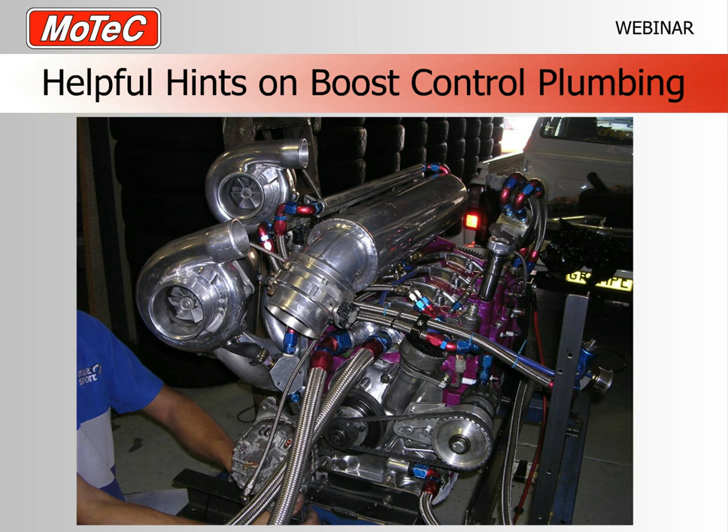This webinar is going to be about getting the boost control system to work correctly via the plumbing of the turbocharger system itself. Boost control, or closed loop boost control in an ECU, is dramatically affected by how the control system is set up. The plumbing of the hoses for the control valve, the turbocharger itself, everything affects how the ECU responds, or how the system will respond to inputs from the ECU.

So today we're going to talk about a few different boost control types: restrictors, some of the control valve differences, some precautions when we're getting this thing set up, some ECU precautions that we're going to go through, things to check inside the ECU, and perhaps a way of testing maximum boost pressure.

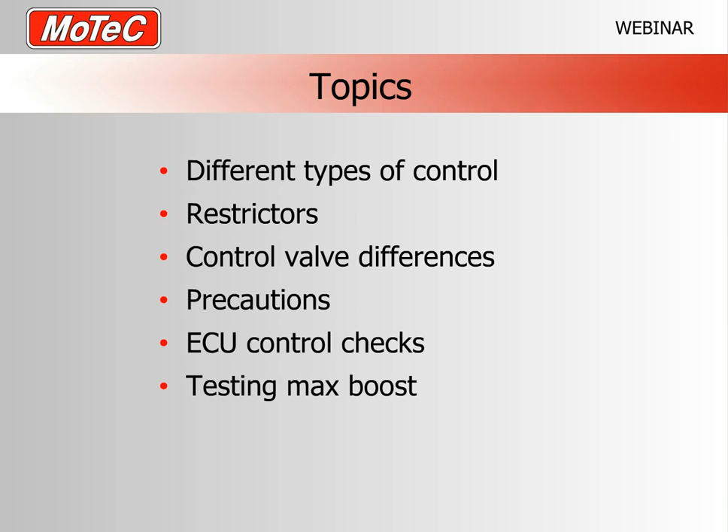So we can have a no control system whereby the turbo, in fact you can have a dead no control system with no wastegate at all, and some diesels have that. But most systems today have some sort of wastegate that gets rid of exhaust pressure to slow down the turbocharger wheel.

Now a very simple system, which was out about 20 years ago perhaps, where you have an integral wastegate, and a simple spring operates against the poppet valve. Once the pressure from the turbocharger exceeds the spring pressure, the gate opens and the exhaust pressure is relieved, and the boost is limited to basically that spring pressure. So there's no control of that other than the manufacturer setting the tension of the spring.

From that system we went on to a manual bleed system, which you'll see shortly, whereby we waste air away from the pressure on the wastegate diaphragm and therefore not let it achieve the boost required to lift the diaphragm against the spring. That way the turbo can make, say, 10 pound of pressure before enough of that pressure gets to lift a 7 pound spring. So the more you bleed away from the system, the higher the boost.

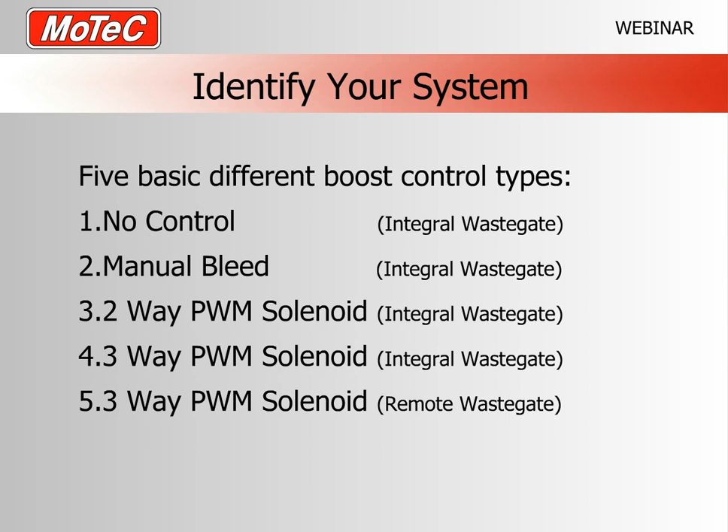Then we went to solenoids, where instead of a manual tap, a solenoid bled air away. Then a 3-way solenoid did it a little bit smarter, and then we went to a remote wastegate on large turbochargers. Race vehicles today often have a remote wastegate and a 3-way solenoid.

So we can have a look at each system.

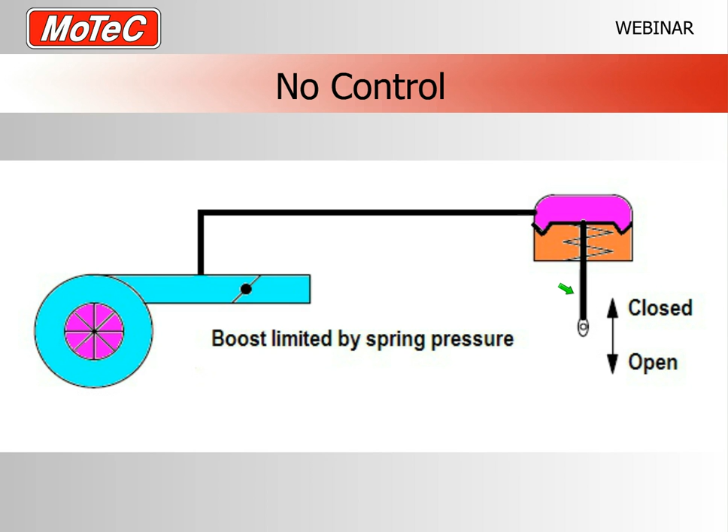And of course, if you want different boost levels for different times, it's very difficult winding on and off with the tap. Obviously you shouldn't be driving. So not an ideal ongoing dimensional way of controlling boost.

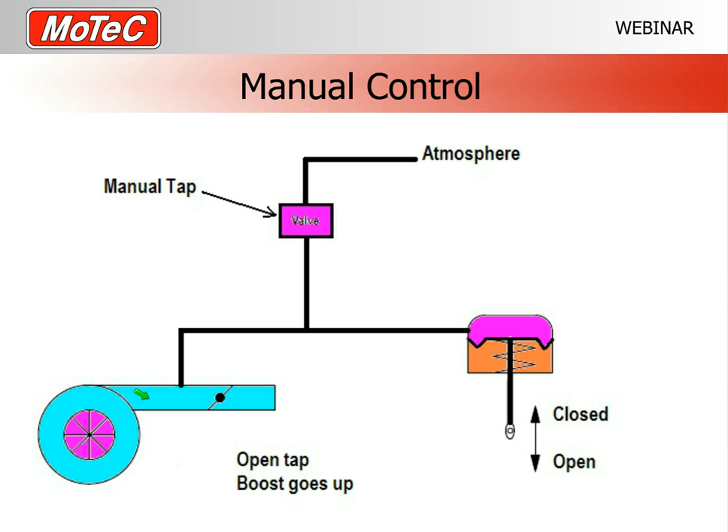Now, modern vehicles from perhaps 1995 on started going to a solenoid that took the place of that manual tap. This solenoid is a pulse width modulated solenoid, and when it's turned on and off, it bleeds air out to the atmosphere. That solenoid is controlled by the ECU, and with the MoTeC ECU we wire it up to an auxiliary output, and that auxiliary output pulses the solenoid to control the amount of air being wasted away from the system.

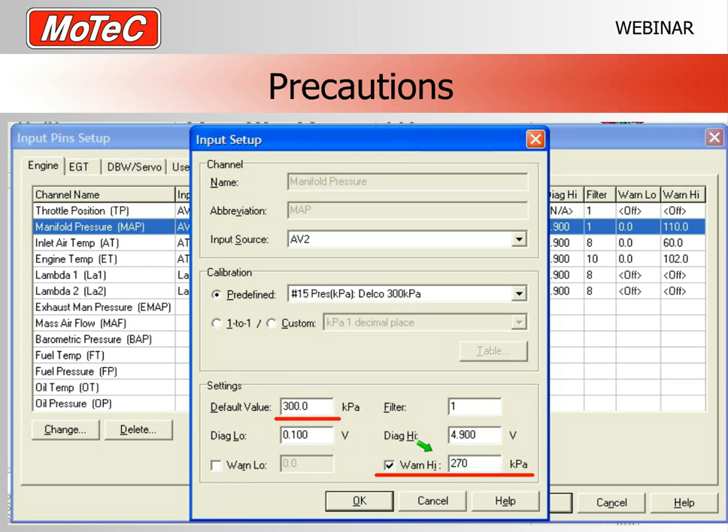The reality, unfortunately, with setting up boost control is that you have to test, and if you don't have a dyno, then you've got to go out in the real world and test. And the overboost scenario is very common while you're getting this right. And in fact, we really do need to find out what the limitations of the system are in order to be able to control them with the computer. So these are 2 precautions that you should look at doing.

Another precaution you can take is having the computer shut the fuel off in an overboost situation. In the boost control setup, under Functions, Boost Control, you'll see a parameter called Overboost Cut. If the ECU detects more than, in this example, 250 kPa, or 1.5 bar boost, it will do a full fuel cut.

If you're riding a motorcycle, jet ski, or even a car without a seat belt and this goes into full boost cut, you'll hit your head on the dash. It absolutely cuts the power, and from holding against the G of acceleration, all of a sudden there's none, so be careful. It will cut the fuel at 100% until boost drops back below 250. It's not great for drivetrains, but it will protect the engine, so use it with care.

The other thing we need to set up in this part of the control is the type of boost control the computer is going to do. There are two distinct types of control our ECUs can use.

You can have duty control, which means you type into the boost aim table the duty you want the solenoid to use. It's not a boost level, it's not closed loop control—it's simply, at this RPM, I might want to use 40% duty. When setting up the boost control system, we'll conduct testing at specific duties. Duty means the amount of on-time versus off-time that the solenoid operates with.

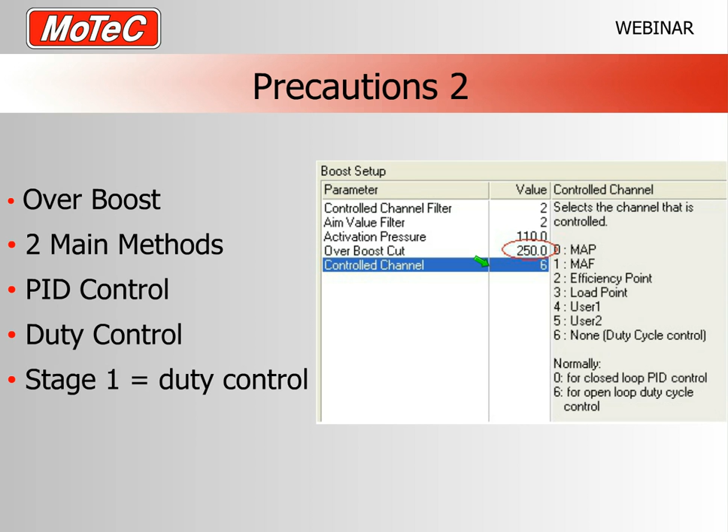At this setup point, we're going to use number 6, which means duty cycle control. Our aim is to find out what duty cycle makes what boost. Once that's sorted, we can move to closed loop PID control. But today's webinar is about getting the plumbing right and getting the ECU in control of the boost, so we're sticking with duty control to start with.

So the basic setup: go into Functions, Boost Control, then into the Aim Boost Table. In this table, you'll put the duty cycle numbers. There are a few other tables you need to get configured correctly.

To see that information, if you're in the boost control aim boost table, you can press F1 and you'll get a help screen, which takes you through the other tables and parameters you need to set. Basically, the proportional gain needs to be set to 1, all other tables set to 0, and all other parameters set to 0 other than max duty, which needs to go to 100.

If you get that part set up, then in the aim boost table, whatever duty you put here should be exactly what the solenoid will do. So if you go for a 20% duty cycle, that means the solenoid, depending on polarity, will be on for 20% of the time and off for 80%. Again, there's another parameter that will change that, so stay tuned for that next.

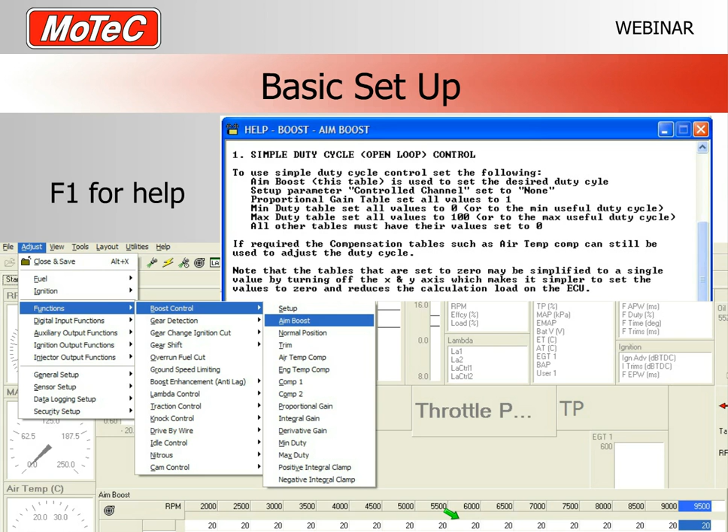Now, because there are different solenoids that, when plumbed in different ways, will change whether the boost goes up or down when they're on, we need to configure the polarity of the system. This isn't easy to understand, unfortunately, but I'll try to cover it for you.

As I said earlier, sometimes turning the solenoid on will make the boost go up, and sometimes, depending on the system, turning it on will make the boost go down. If you want numbers in your boost aim table where larger numbers mean more boost and lower numbers mean less boost, you need to get the polarity setting correct. So what this means is, when we say 20%, does that mean 20% off or 20% on? I think that's possibly the best way of looking at it.

I've done a diagram to help understand that. The normal setup is: bigger boost aim duty numbers mean more boost. So when we have a 20% duty and we go to 30 in the table, normally we'd expect that to make more.

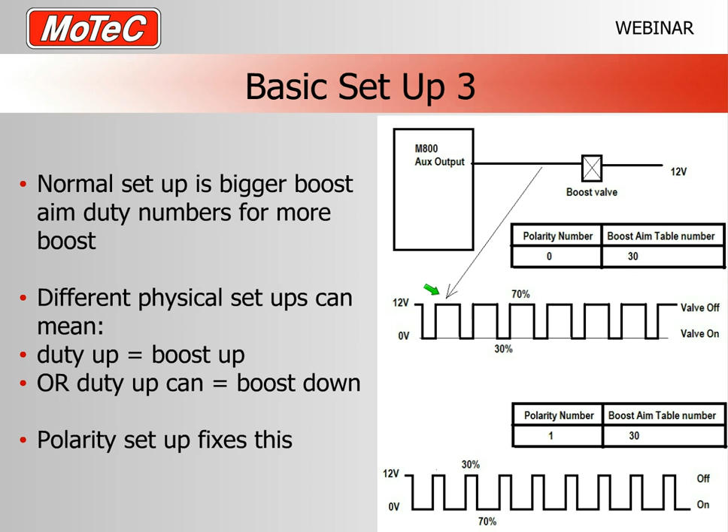If we have a polarity number of 0, that means the 30% refers to the on time. If we change the polarity number to 1, that means the 30% refers to the off time. So for valves that make the boost go up when the valve is off, the polarity is 1. If you have a boost control system and larger duty numbers in your boost aim table make the boost go down, fix that by changing the polarity in the setup.

So now, testing. First thing we need to do is go into the boost aim table. This is where we'll be entering numbers to get our boost to respond. There is a shortcut for that, and that's F7. If you press F7, you'll go straight to the aim boost table.

Normally you'd expect an ideal situation where a duty number of less than 50, maybe down to 30, is your minimum boost, and a number around 80 is your maximum boost. So you're getting effectively somewhere between 40 and 50% duty cycle spanning the boost control range you want. That gives the computer, when it comes to PID control, a nice amount of resolution to do what it needs to do to work well.

If you have the polarity configured correctly, you would start with 0 duty and test how much boost the engine makes. If it makes your minimum boost setting, which is your spring setting, then everything's gone well. So if we have a 20 pound spring, I'd expect that to make 20 pound boost with a 0 duty cycle in the aim boost.

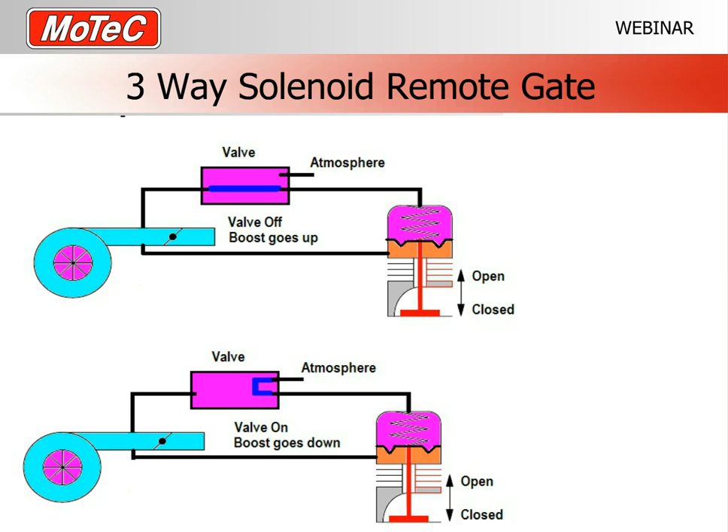So assuming you have the gate now physically jammed closed, and that there's no way the exhaust gas can be bypassed, very carefully bring the engine up to create a boost situation. If it has a big turbocharger and your problem is actually something to do with the boost control, it will make a lot of boost, and so you will probably hit your overboost cut, or overboost the engine. You must be very careful doing that, and I'd suggest this isn't a good test to do with someone out in a car on a track.

But nonetheless, you need to make sure that your physical turbocharger intercooler system has the physical capability of producing the boost that you want to run. If you don't, if the system can't produce the 28 pound, for example, that you want to run, then the computer will never get it to happen either.

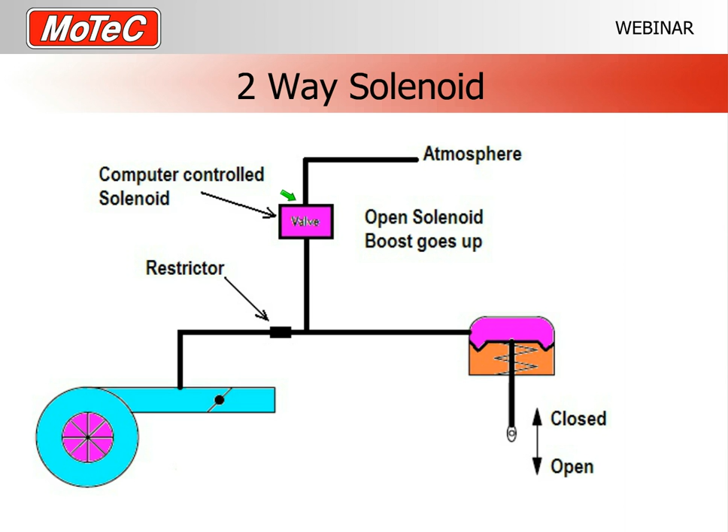Now, it could be as simple as the hose blocked here. It could be the fact that the computer can't waste enough away to get the boost because the restrictor here is too big. There are many reasons, and you have to go through and try to diagnose what they are.

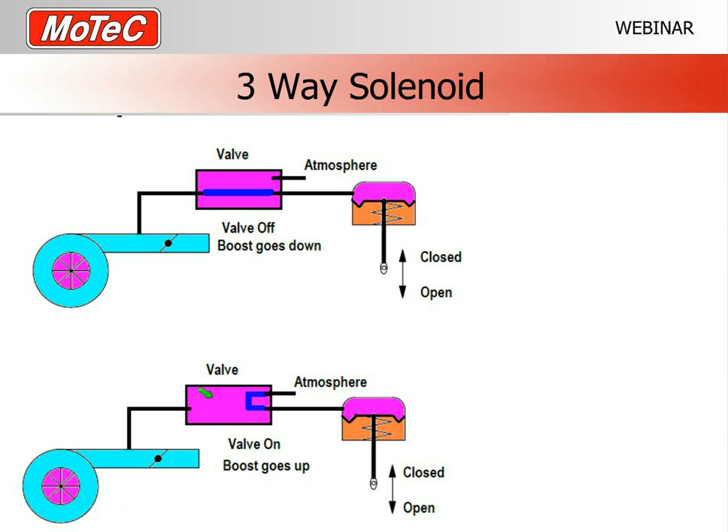Perhaps one of the other things you could also check is in the ECU setup, you can, in auxiliary output testing, test that the valve itself is pulsing. You can actually test that it pulses, change the duty during that test, and physically blow through the valve and make sure that it's passing air. If you've got it wired to the wrong auxiliary output, or some part of the plumbing wrong, then for sure the boost won't go up or down.

So that's effectively the aim of the whole exercise. We want to see the desired boost reached by putting in a certain duty cycle in the table here.

Now, while you're tuning this thing, you can actually drop the aim boost table down to just one number, just for the purposes of tuning. Simply push A for axis, go into the axis setup and untick both boxes, and you'll be down to one number, so a single number here for the aim boost. This will allow you to easily just change the duty of the solenoid no matter what the RPM or throttle position is, and have control over the test.

So you know you've got a good job done when you can type in a different number and get a different boost value. Once that's done, you're ready for the next stage, and that's setting up for PID control.

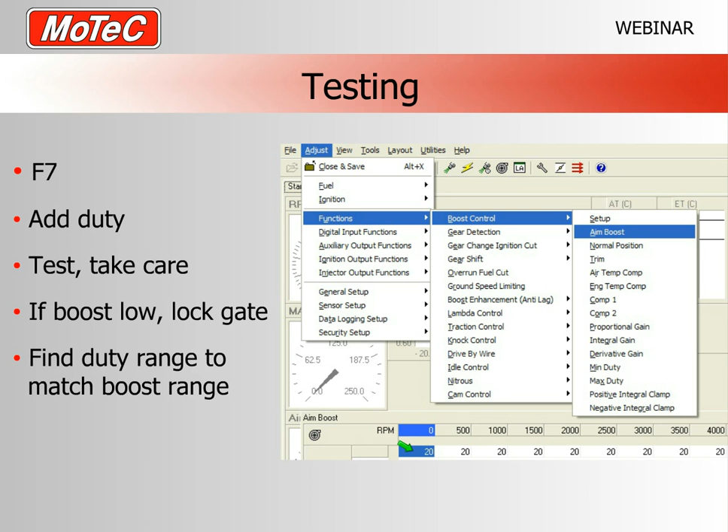Now, we'll cover PID control in a future webinar. That future webinar will be about setting up the normal position table, but it will assume that the computer has control over the boost. And for that to happen, we need to get this part sorted. So, got that, we're on for a successful boost control tuning session.